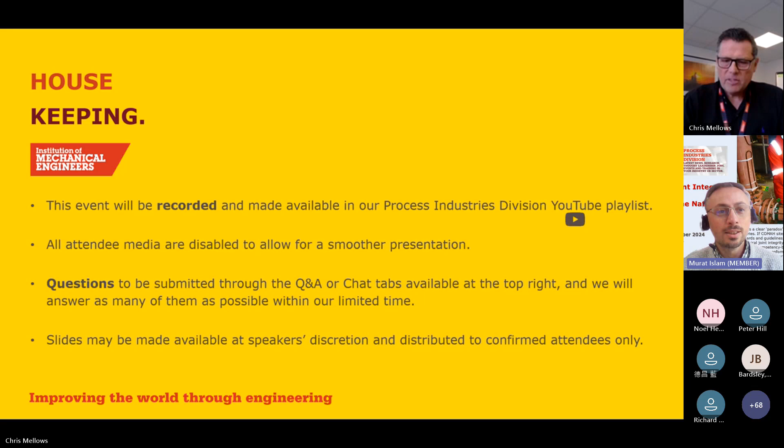Okay, thank you, Murat. As Murat explained there, this is hopefully the first in a series of webinars, looking specifically at mechanical joint integrity and the issues and concerns that we are finding and have been finding for many years now in our process industries. I hope you find the presentation of interest. So the way in which I've set this out is I'll do a quick introduction, just going on from Murat. Just going to look at the current state of mechanical competency in the UK. I'm going to be sharing some data, some statistics, lots of photographs and things that we find out in industry.

I'm going to look specifically at the current mechanical joint integrity standards, the guidelines, the compliance documentation that is readily available for our process industries. I'm specifically then going to look at the industry approved mechanical joint integrity training standards and qualifications for those that are responsible for making, breaking containment and remaking bolted flange joints. And then, look at the future, because there is a future. And then I'm going to summarize and hopefully we'll have a Q&A session at the end.

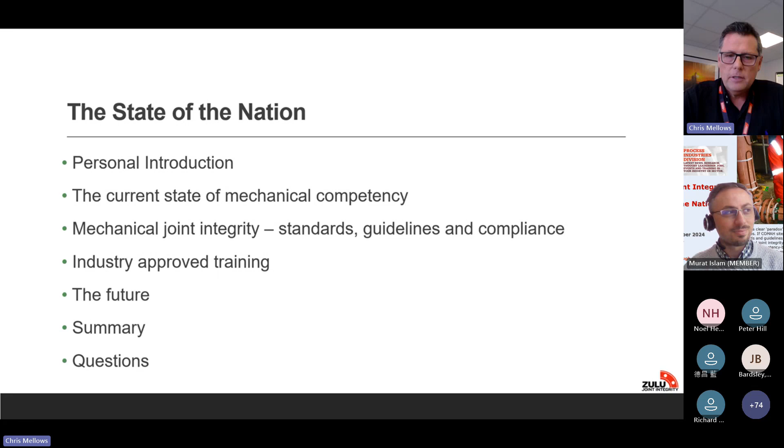So just a little bit about me, just going on from what Murat said. I'm the founder and director of Zulu Joint Integrity and Training Limited. Initially started the business 15 years ago, actually, this December. I've been involved in IMechE for the last 2 years, I think, maybe 3 years. I'm a Process Industries Division Board member and on the Education and Skills Strategy Board as well. I'm a board member of that, which is very interesting because we are looking at the subject of mechanical engineering throughout the UK, from school level, with STEM, etc., through to apprenticeships and the existing workforce that we have in industry.

My background, I'm a time-served engineer and apprentice. For those of you that remember the days of BP Chemicals, I'm a fitter and turner by trade and came through the apprenticeship route about 34 years ago. I've got a lot of experience in the oil and gas, petrochemical and chemical industries, specifically looking at hydrofluoric alkylation units on oil refineries, specifically for joint integrity and flange inspection. So that'll give you an idea of who I am and a bit about my background.

The business, so Zulu Joint Integrity, we are a joint integrity compliance and training company, basically. We help support UK industry and further afield. We actually operate overseas now as well. We look specifically at COMAH registered assets. We carry out compliance audits where we benchmark against the current standards and guidelines in terms of mechanical joint integrity.

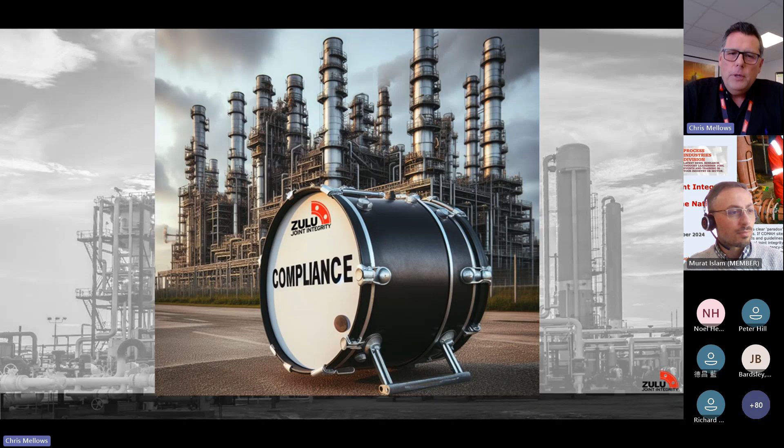There's a bit of an in-joke actually with us at the moment that we always seem to be beating the drum for compliance, and that's what we do as a business. I'm very passionate about the subject matter. Our business is very passionate about the issues and concerns that we are finding in industry, and it is that passion that really does drive us, and allows me to speak on a platform such as IMechE to yourselves about this very serious and often overlooked subject matter.

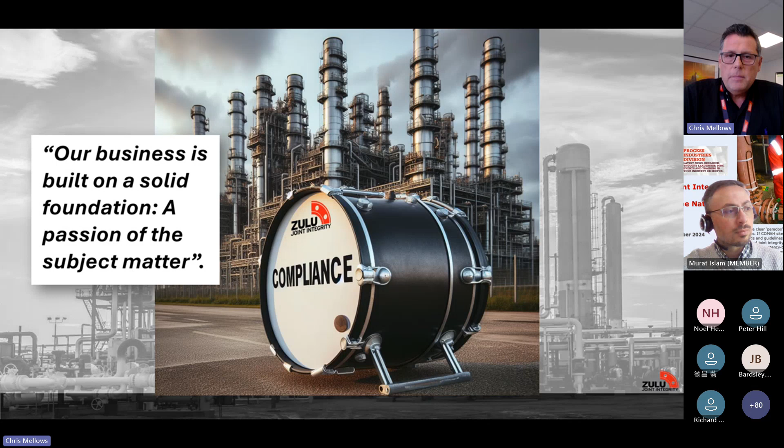We really do have to look at the current state of mechanical competency, and if there are any members who are present today in a turnaround role or maintenance role, you will no doubt have felt the pain during a turnaround event, etc.

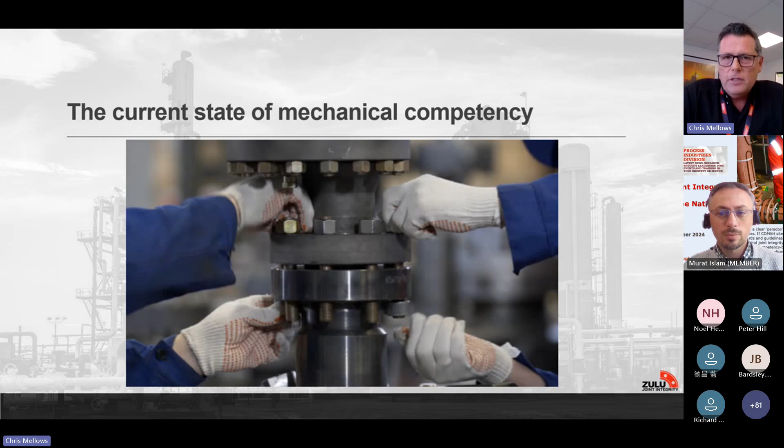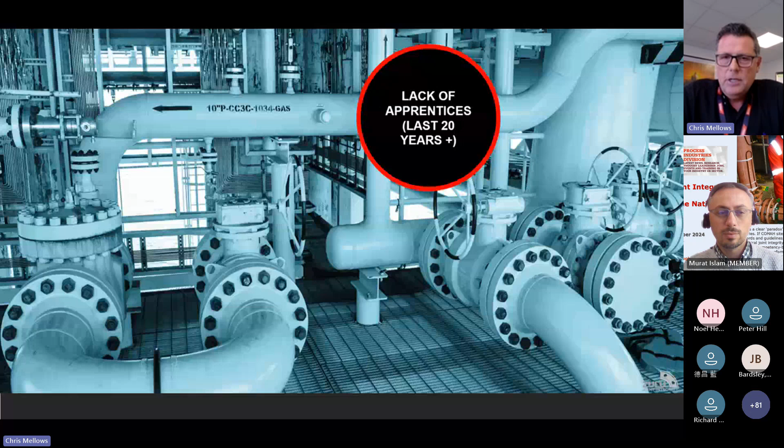We need to determine where our current process industries sit, and we have to understand the current state of mechanical competency. So if we look as a snapshot of history, if you like, we have had certainly a lack of apprenticeships over the last, I would say, probably 20 years across the board. And I'm honing in specifically on mechanical engineering apprentices. And that certainly has affected where we sit right now.

We have a lot of chancers, I'm going to say, in our industry. And yes, they've always been there in some shape or form. But we are, particularly over the last 2 to 3 years, seeing a very high level of bad workmanship, incompetencies. And when you investigate the personnel, perhaps, that have been responsible for loss of containment, for example, they are not who they say they are.

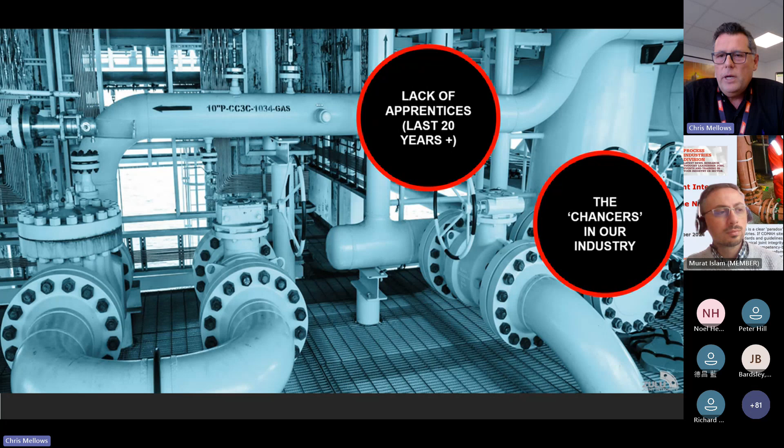So it's therefore very important that the checks and balances are put into place to ensure that the right people, and it's very difficult at the moment, I understand, because the labour pool is so saturated with these people. But we are seeing a worrying amount of chancers in our industry.

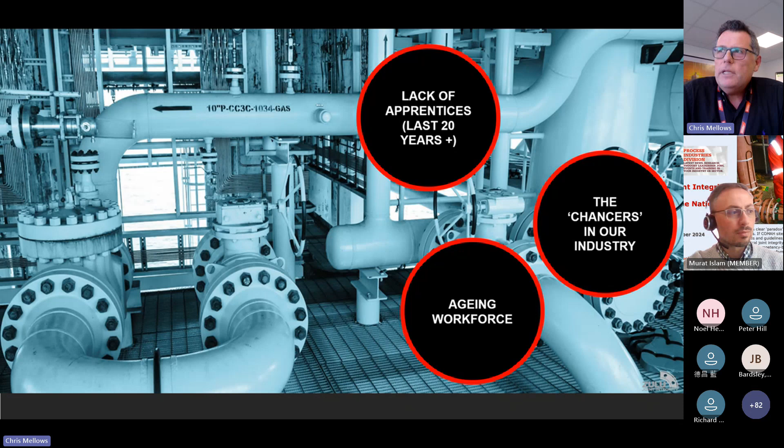We have an ageing workforce, and I'm not here to be ageist in any shape or form. But these people who no doubt have got a lot of industry experience, when they are retiring, we just don't have the younger element coming through to replace them. COVID actually really did hit industry. In fact, the demographic, if you look at people between the age of 50 and 60, were deciding post-COVID that they wanted to retire early. So it really did leave quite a gaping hole in our current industry.

Historically, there's been a shift towards academic education, and obviously there's a requirement and a need for that. But it seems that over the last 20 odd years plus, there's generally been a feel for young people to go to university to do a degree. Doesn't really matter what kind of degree that is. And therefore that has affected the apprenticeship scenario.

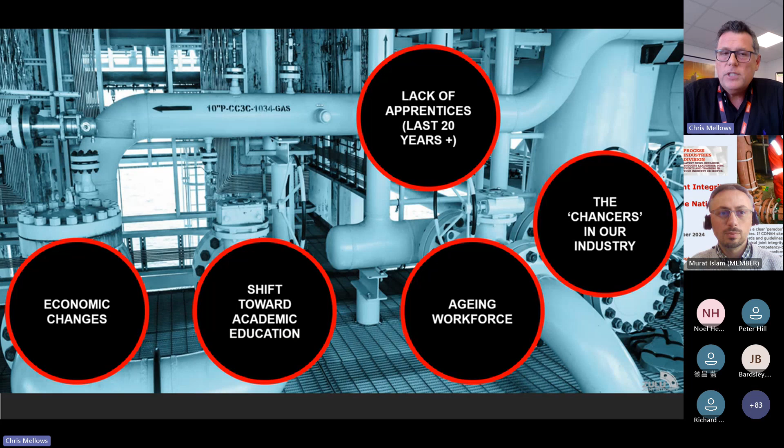Yes, there's been economic changes. I remember when I was an apprentice, when I started in 1990, there were 12 oil refineries in the UK. So that'll give you an idea of the way in which our industry has changed over the last 30 years. However, there are still a sizable amount, hundreds upon hundreds of COMAH registered sites within the UK. And so our process industries are certainly still buoyant, I would say.

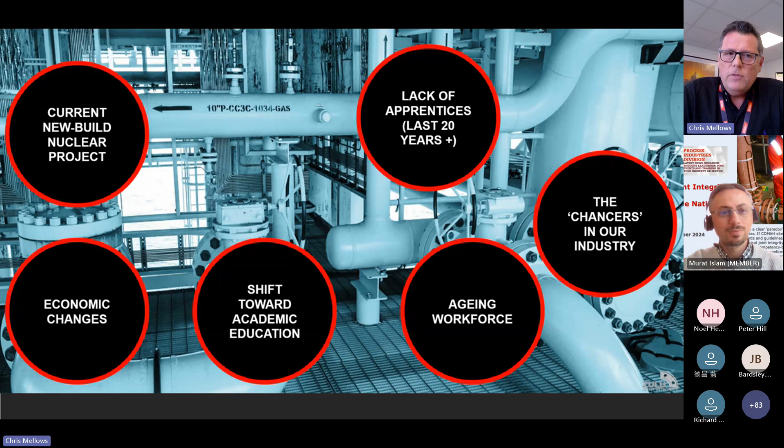And we have to acknowledge the fact that there are going to be, and there are currently, some massive nuclear projects within the UK. And I will mention the likes of Hinkley Point C, that seems to be kind of sucking the life out of our existing industries. There seems to be an exodus of personnel within UK industries wanting to get onto that project. And I think it's safe to say that we are all feeling the pinch of that throughout all the corners of the UK currently. So it's, I'm not going to say the perfect recipe for disaster, but it's the perfect recipe for the position that we're in right now, particularly in terms of competency levels.

As it's coming up to Halloween, I thought I'd put together a bit of a chamber of horrors. We've literally got 15 years' worth of photographs and evidence of bad things that we continue to see in industry when we are carrying out our compliance audits and flange inspection programs, etc. So here's just a snapshot of typical things that we find.

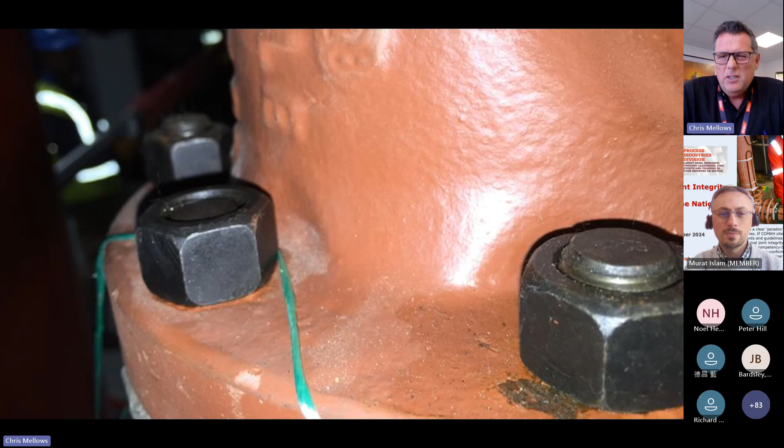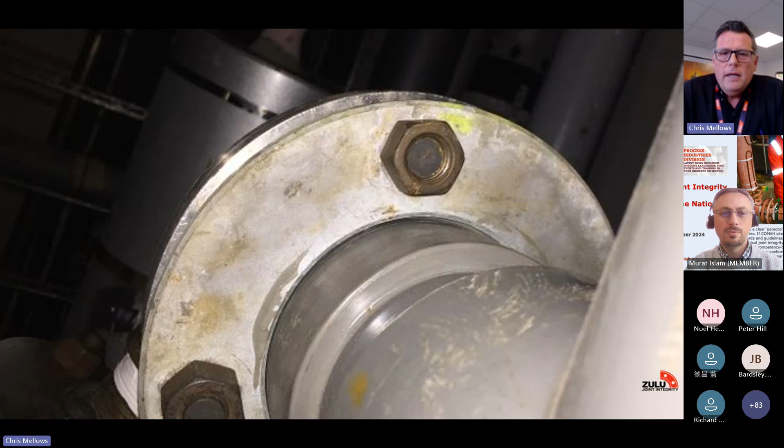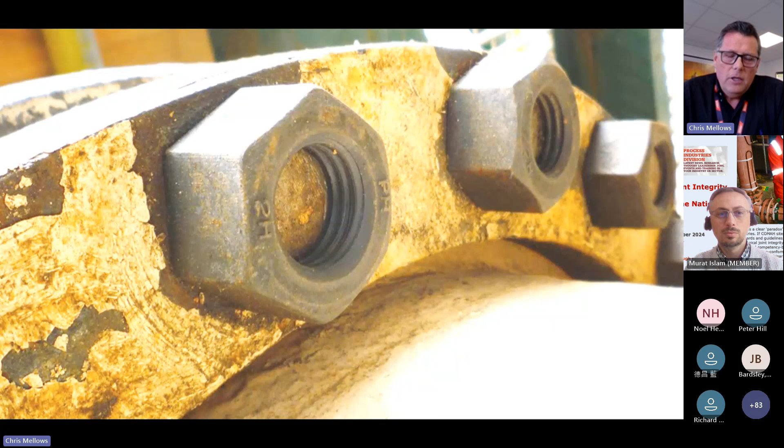A bugbear of mine would be bolt length, for example. Standards that are out there, and most sites, stipulate that bolt lengths should be a minimum of 2 to 3 threads. We don't accept anything less, and we are seeing an increasing number of these across our sites. Nuts on the back, on the reverse, on the wrong way round. And of course, there are varying levels of what we're going to say are short bolts. And that's probably one of the worst I've seen. And by the way, these are all photographs on upper tier COMAH sites within the UK, and this is just the tip of the iceberg.

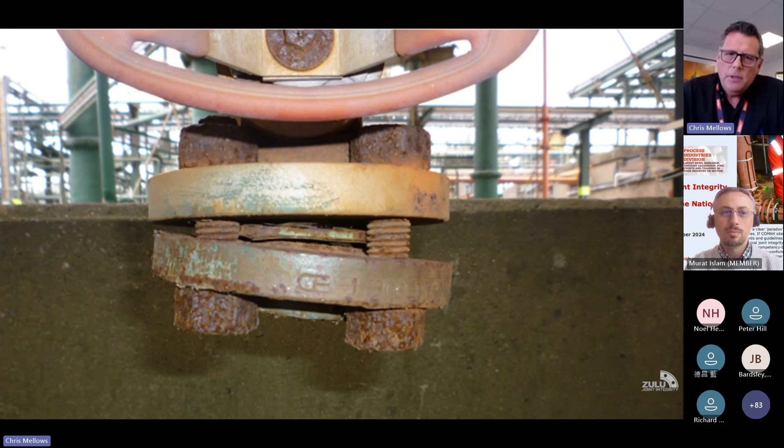Angular misalignment, parallel misalignment, we still see a significant amount of these on site. And as you can see from that photograph, that flange has been sort of left in situ like that for some time without anybody addressing it. We are just going through some turnaround events in the UK, and we look at collecting data during those turnarounds, and it's still evident that misalignment is certainly one of the top problems that we are finding, particularly in the chemical industry, where soft gaskets are used, for example, PTFE envelope gaskets, etc.

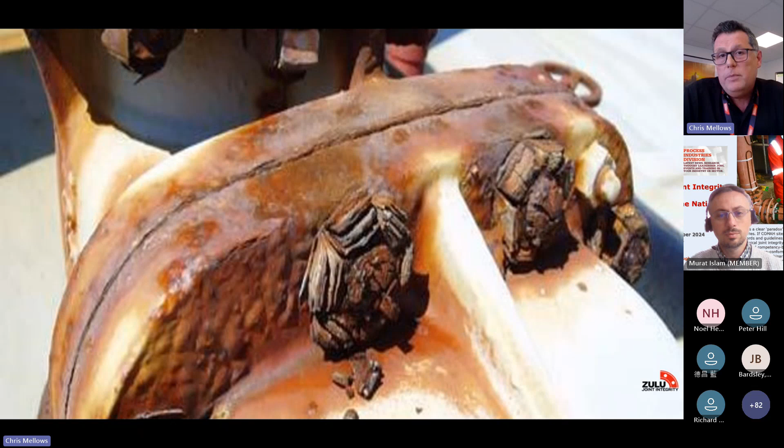We see a mixture of things like incorrect bolt materials being used, dissimilar materials, incorrect bolt length, incorrect bolts, including the diameter of the bolt, for example. We still see a lot of this on site. Corrosion is a massive problem also in the UK. Our sites are getting older, obviously, and maintenance is key, as we all know. However, we still continue to see plant and equipment in this state. Corrosion under lagging is still a big problem and concern, and always seems to have been, but it really is exaggerated right now.

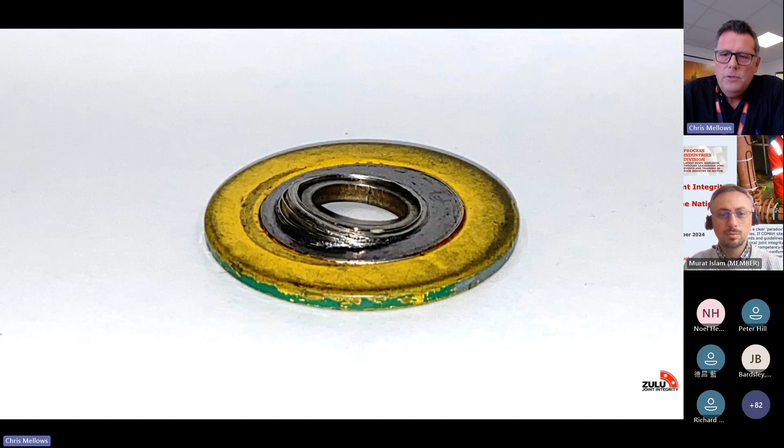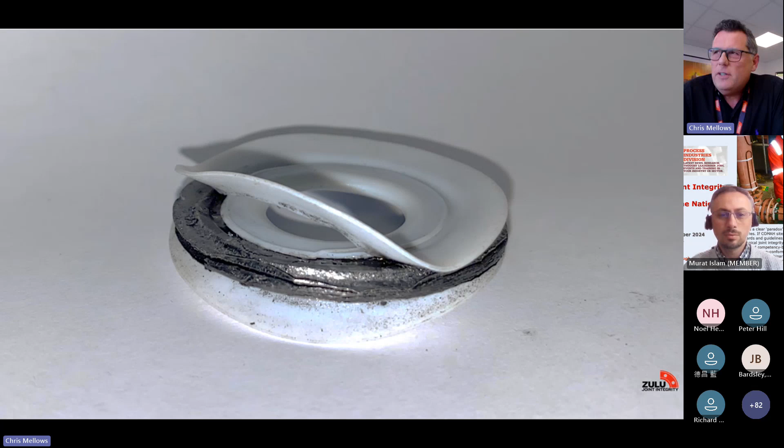We see a lot of issues relating to things like loose bolts, and I mean finger loose. You can move the nut on the thread. Likewise, we see a lot of over-torqued bolts on flanges because the bolts are being flogged up and gunned up using unconventional old methods rather than a controlled method such as using a torque wrench, etc. So therefore bolts are being put into yield. Particularly soft gaskets like this one, a PTFE envelope gasket, have been absolutely destroyed because the tightness of that flange is based on somebody's interpretation by hitting a spanner, or pulling up on something, rather than using a controlled method such as a calibrated torque wrench. So soft materials don't really stand much of a chance.

And we're still seeing a high level of these on chemical sites, even though the chemical site actually uses torque wrenches and they give out torque data to the personnel and to the contractors. But there is a human factor here as well, and that factor is that people like to just pull up a little bit more, or just make sure everything is tight enough, I guess, in their mind. We encourage people to stick to those torque figures that they're given and never exceed them.

We do still see 2 gaskets back to back. On the off chance we will see something like this where you've got 3 gaskets. The maximum we've seen is 5 spiral wound gaskets, all back to back. Generally, if something doesn't look that good, it probably isn't that good, and that's definitely a trait when out in the field looking at the state of a plant where we've got incorrect diameter bolts, etc. Double nutting, we still see that now and again.

Cutting gaskets, I'm sure you're all familiar. You might have seen something similar where the rule of thumb is the only gasket you cut is sheet gasket with a gasket cutter. You never alter the design of a gasket, but we're still seeing a lot of spiral wound gaskets that have been cut to size. Loose bolts, no bolts.

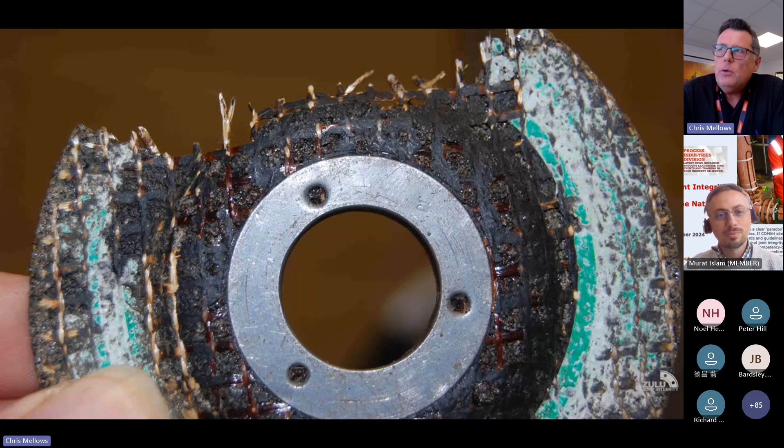And just when you think you've seen it all, about 4 or 5 years ago, we came across 2 separate sites in the UK, both within the chemical industry. One was a brand new 20-bar steam system project where we found, I think it was 5 or 6 slitting discs used as gaskets. And this particular one from another chemical plant that had obviously been in situ for some time and was leaking. I mean, that goes beyond somebody's rational sort of thought of using a sealing element within a bolted joint. And that's the problems that we are still facing, unfortunately.

I mentioned earlier on that we collect a lot of data, and data is a powerful method of really seeing the state of the plant, if you like, at the work face. So, for example, if you already use an existing joint integrity program whereby you record the amount of flanges that have been perhaps looked at during a turnaround event, as long as all the data is there, you can really dig down quite deep and find trends, for example, and see things that might be affected by perhaps the competency of the people on site.

What's interesting for me right now is that some of the turnaround events that we're doing, I've looked at the collective data, and we categorize our defects that we find out on site simply 1, 2, and 3. 3 being the worst, such as no gasket, wrong size gasket, loose bolts, that kind of stuff. Things that would ultimately result in loss of primary containment, for example. And unfortunately, category 2 and 3 make up about 50% of all our findings currently. And currently, we are looking at probably in excess of 6,000 to 7,000 bolted joints that we've inspected. That is a worry.

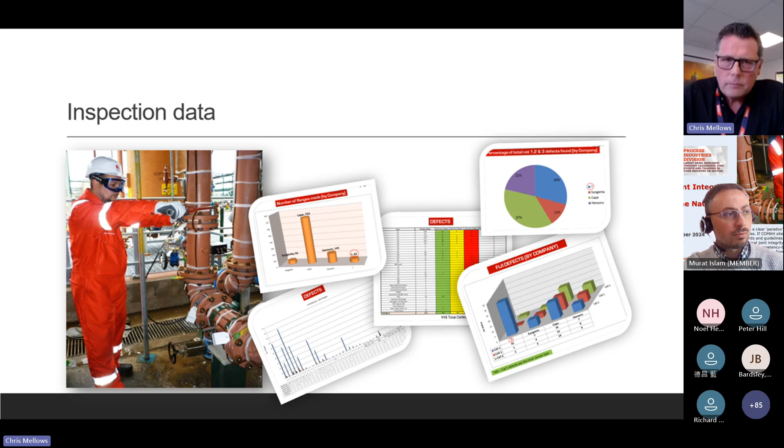Earlier on this year in April, there was a bolted joint seminar with IMechE in Newcastle, and it was a very popular event, and that's what really started this off. At the time, I was giving a very similar kind of talk during that seminar, and as part of my preparation, I did this, and this data is very interesting, I think, because it relates to our business, my business, in terms of flange inspection. And I've gone back on data that starts back in 2010, right up to 2023.

The green bars that you can see there are basically the numbers of bolted joints that we inspect on turnarounds and projects and things like that. And the red bars are the number of defects that we find. What I've done is I filtered out all the insignificant defects and just left in the bad stuff. And the black boxes that you can see there are the percentage defect. Now, what's interesting to me is that the green bars are getting more as the years go by, because hopefully our business is growing and we get more work. But sadly, the percentage defects are also increasing.

If you look at 2023, for example, we inspected nearly 12,000 bolted flange joints. That's either physically inspecting flange face conditions before the flanges are made, or physically looking at the made bolted joint. We torque check, we load check every single nut and bolt. That's quite a lot of work there, but to have almost 14% of all those inspections fail because of loose bolts, over torqued, wrong gasket, wrong size gasket, wrong type gasket, no gasket, slitting disc, that is a big concern.

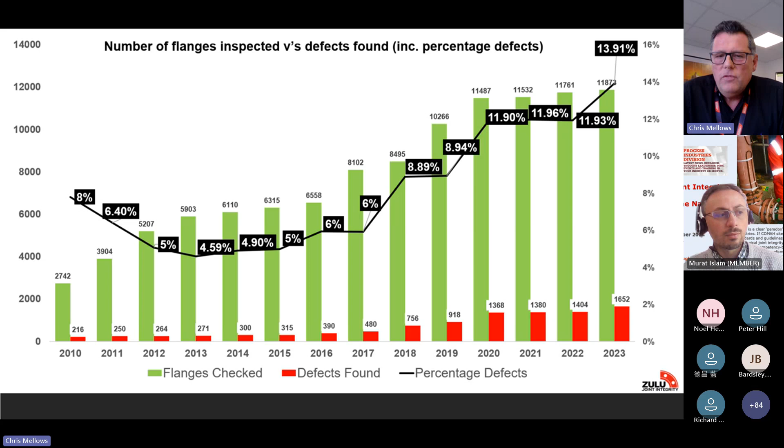It's a big worry, and I'm more than happy to share this, because this is just us, by the way. We're a relatively small medium business. It'd be interesting to see what other people are finding on their assets and so forth. So I just wanted to share that with you.

And initially, we always find when the plant and equipment is going back together, there's an initial spike of defects that are found. And typically, the asset owner will either have some sort of stand down or toolbox talk or whatever it might be, and encourage everyone, listen, let's stay focused on this. Let's look at best practice and so forth. And by the next week, things are really kind of dropping back down again. Even though the work is being carried out, we do not see that level of defects.

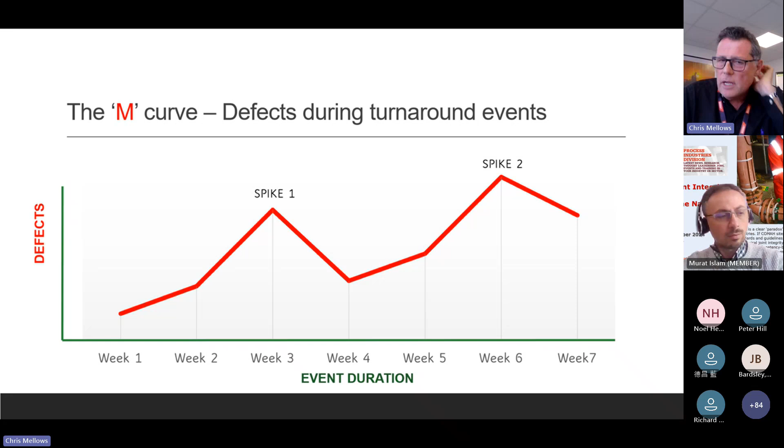And at that point, their interest, I guess, is, what's my next job? Where am I going to be working, etc. And they really take their mind off the job in hand. And we definitely see this particular M curve. So it's interesting for me. And we've gone back probably over the last 6 or 7 years, and definitely you can see a trend there.

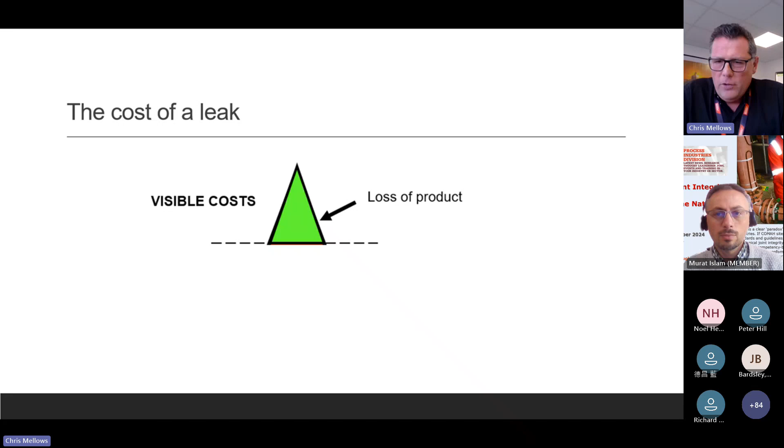The cost of a leak, well, there is a cost to everything. Obviously, there's a cost to a fatality. There's a cost to any type of accident, environmental incident, etc. The visible costs, I'm sure you might have seen something similar in the past, maybe. But the visible costs: you see the loss of product. You see the steam leak, the water that's dripping from that flange that nobody ever bothers with, but then we look at what we call the invisible costs, which are astronomical, actually.

The labor to repair leaks, the material, the plant inefficiency, the environmental fines, the lost sales due to poor image. No company wants to be on headline news for all the wrong reasons, that's for sure.

And it does still amaze me that I speak to organisations that are either upper or lower tier COMAH sites that don't have a recognised joint integrity process or procedure, and they ask me to come to site to give them a talk on what's required, and whether we can support them going forward. And it surprises me how many people actually say, well, how much is this going to cost then, to do this?

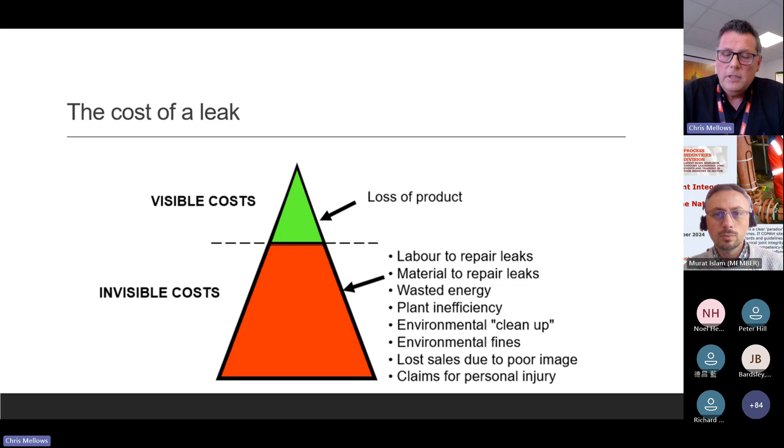And I find that a little bit disturbing and sad, actually, because what we do find is generally when things are done correctly, that will significantly reduce the possibility of a loss of containment and worse, obviously.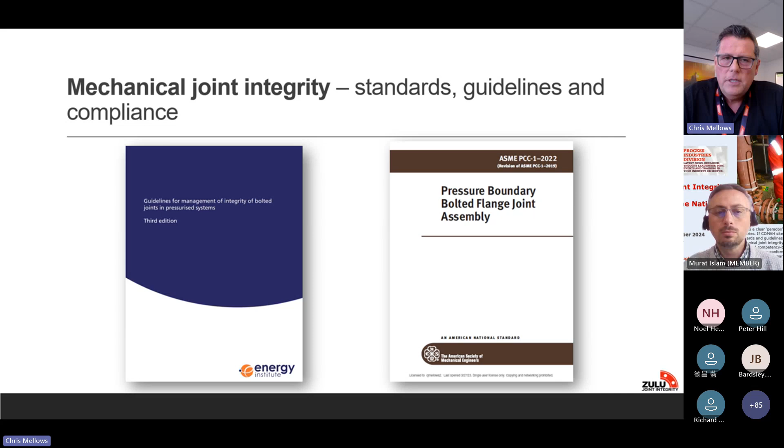Before I come on to the specifics of the training requirements, I just want to look at the standards and the guidelines and the compliance that's available right now in industry. Putting COMAH to one side, specifically, there are two standards and guidelines that are very, very important to our process industries. I just want to briefly go through them. The first one is the current 3rd edition of the Energy Institute guidelines for management of integrity of bolted joints in pressurized systems.

The Energy Institute obviously is the chartered professional membership body for the energy industry in the UK. This particular document describes the principles and good practice for the establishment of a management system for bolted joints in pressurized systems. It's an excellent document. As far as I know, the Health and Safety Executive partly wrote this document. They were certainly involved with it in its early days. And I know that the Health and Safety Executive, particularly during this seminar that we had, was speaking very highly of this guideline and what's contained within it.

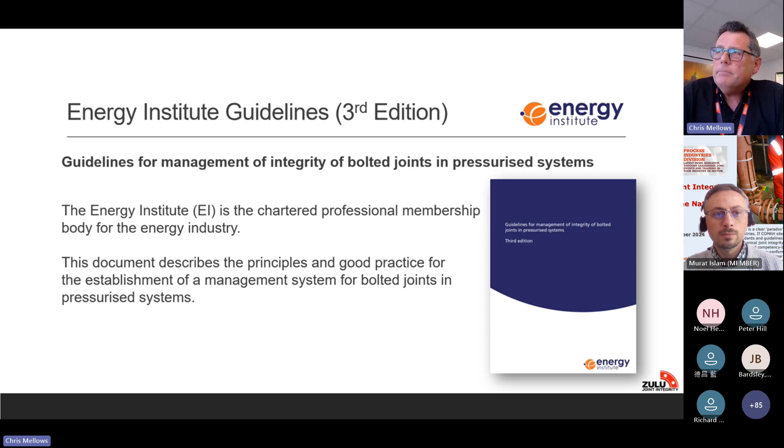I'm going to dampen it down a bit and say it's a dummies guide. I'm sorry, that's probably the wrong word, but if an asset doesn't have anything in terms of mechanical joint integrity, looking at the whole subject of it, then this really is an absolutely fantastic document to read and to follow. As a business, we encourage our clients to follow this guideline, and I'm happy to say that lots of them do. And it covers pretty much anything and everything from theory of mechanical joint integrity, integrity testing, hot bolting procedures, records and data management.

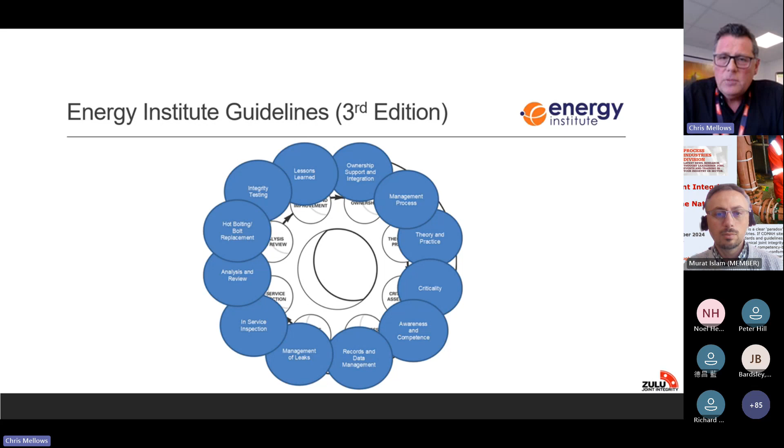It covers everything and anything to do with mechanical joint integrity, tagging, for example, criticality rating of flanges. And very importantly, it looks specifically at training and competency. So in section 5, for example, there is clear guidance on what qualifications your personnel or contractor personnel should have in terms of mechanical joint integrity.

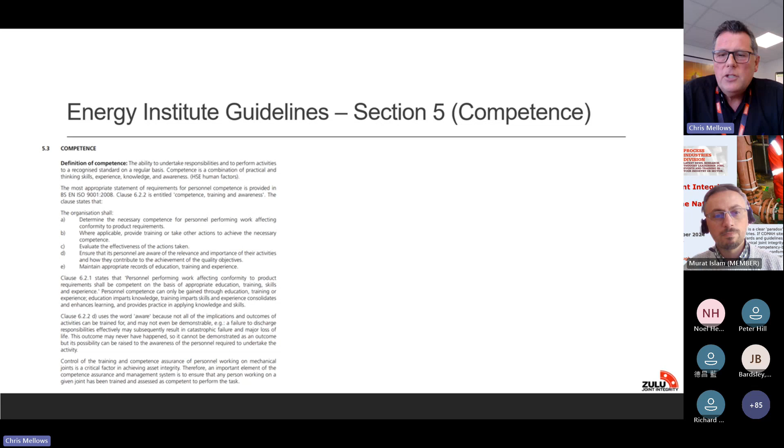Now, if you're like me, of a certain age, you remember that once upon a time there were no specific qualifications for mechanical joint integrity. It was the apprenticeship route, the ONC, the HNC, the City and Guilds, and it was all about learning on the job from your peers, etc. And what I will say is that the offshore industry, for example, has really championed the training and competencies required, probably for the last 25, 30 years, maybe. And it's good to see that being disseminated throughout our downstream process industries.

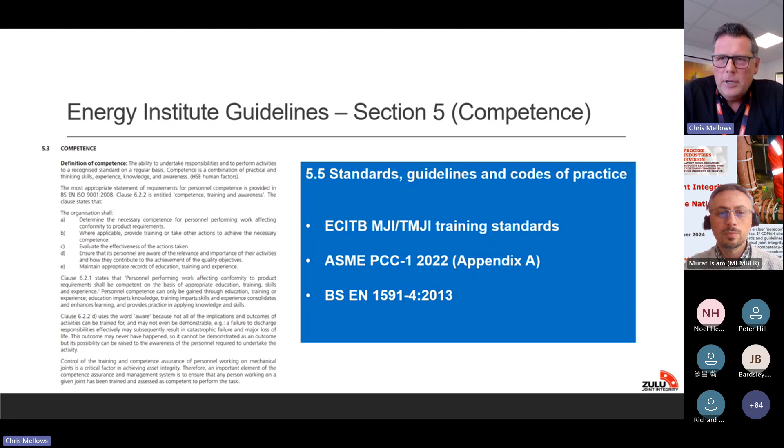Specifically, it looks at ECITB MJI and TMJI training standards, ASME PCC-1 2022, and BS EN 1591 Part 4. And I'll go into greater detail on it, but it says in there in black and white, and bearing in mind the Health and Safety Executive were involved in this, they are kind of telling you that, if I were you, I would get your guys and girls trained to these standards.

The other document is a very powerful standard, which we are seeing many changes with in the UK industry over the last 2 years: the current ASME PCC-1 2022, and in particular Appendix A, which refers to the training requirements. The ASME PCC-1 traditionally was a guideline, and a very good guideline at that, and lots of companies would take elements of that to be used within their existing joint integrity programs and their policies and procedures, etc. But in 2022, it became elevated to a standard within itself, and we've seen quite a shift change.

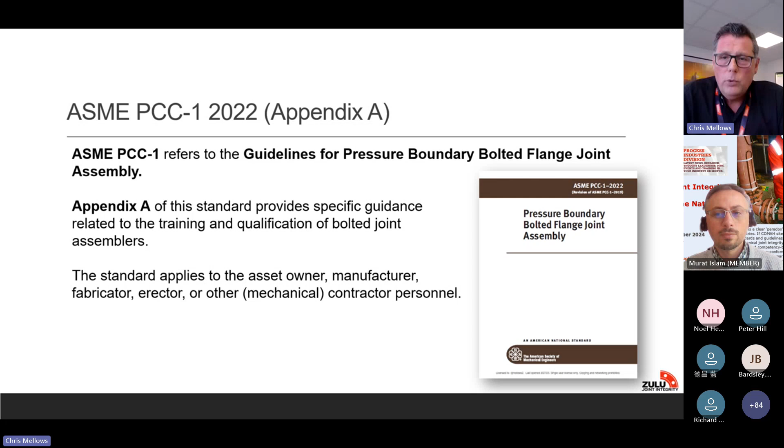I can't mention any names, but there are 2 oil refineries that come to mind in the UK that specifically look at ASME PCC-1 2022 as their guidance for onboarding of contractors, for example, in terms of competency levels. And just moving on to competency, according to the HSE, the true definition of competency is the ability to undertake responsibilities and perform activities to a recognized standard on a regular basis.

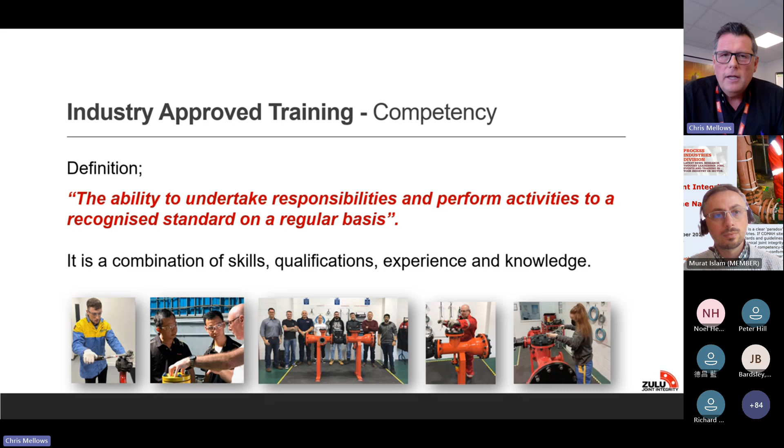And the big difference between training and competency is that people can be trained to do a task, but to be competent in something is completely different, because competency is based on a number of things, including your qualifications, your skills, your knowledge, and your experience. That's the key thing here. Just because somebody goes on a joint integrity training course for a day or a week doesn't make them competent. Absolutely doesn't make them competent.

So what do we have? Well, the three main training qualifications are the following. We've got the Engineering Construction Industry Training Board. We have the American Society of Mechanical Engineers, and we've got the British Standards also. So let's just take a little bit more detail on these. So ECITB, for example, you might be familiar with this.

Mechanical joint integrity and technical mechanical joint integrity training standards, also known as MJI or TMJI, are standards that, if you look at the history of them, derived from the UK offshore industry. And this is all to do with hand-torqued, flanged and clamp connector pipe joints. There are variations. So, for example, MJI 10 is the use of hand torque wrenches. MJI 18 is hydraulic torquing. MJI 19 is tensioning of bolts. And there are technical tests involved thereafter the initial.

What I like about this, actually, is there is a definite route to competency. It's not just about turning up and doing a 1-day or 3-day training course. You have to prove competency. So they've developed a clear route that also involves recording on site, a bit like an NVQ, I guess, work that you're doing, particularly making bolted joints, and having a supervisor sign that to say, yes, I agree that Chris was working on those flanges on that date, etc. And then you have to come back and do a technical test.

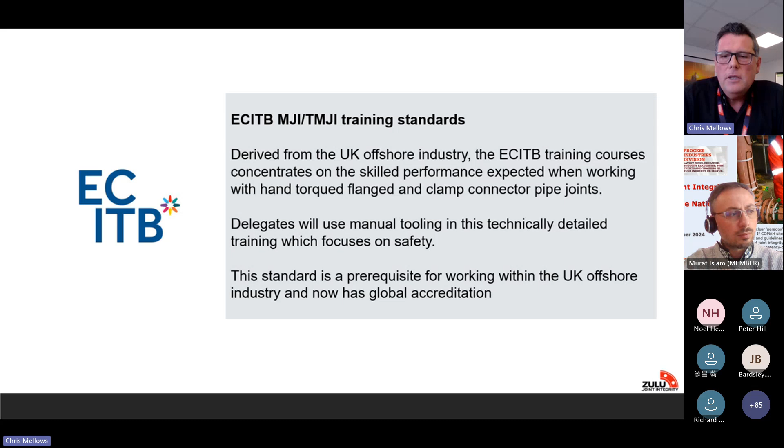You might well see on perhaps LinkedIn, for example, there are companies now in Malaysia and further afield in the Middle East who are developing and delivering ECITB joint integrity qualifications. The second one, well, as I mentioned earlier on, ASME, big changer, in 2022 when it became a standard.

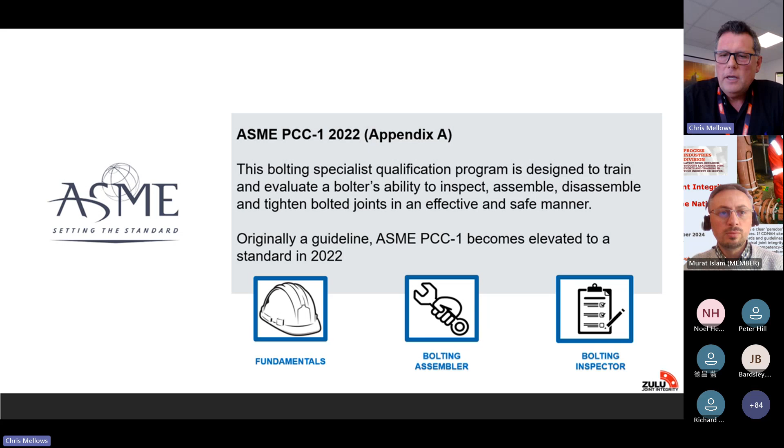The bolting specialist qualification program is split into 3 distinct areas: fundamentals, bolting assembler, and the inspection element. Fundamentals are for those who are new to industry. For apprentices, for example, it looks at the fundamentals of mechanical joint integrity. The bolting assembler is geared up towards the person who's responsible for remaking that bolted joint. And if you are involved in a QA or flange inspection role, then the third one would be the choice for you, really.

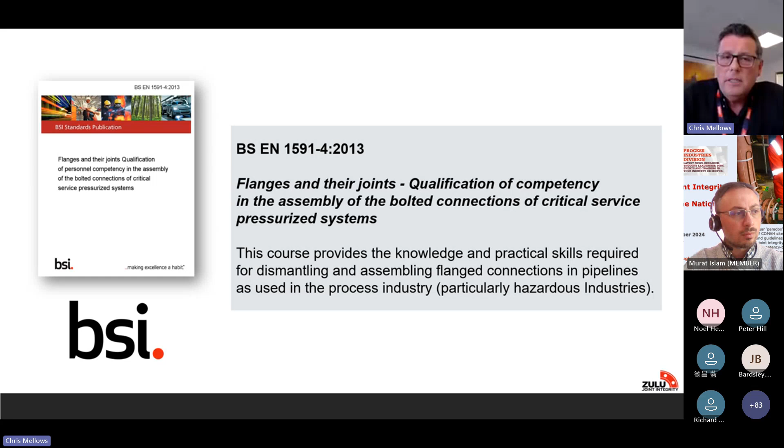EN 1591, also known as BS EN 1591, Part 4. Again, this is proving to be a very popular training course. This course provides the knowledge, the practical skills required for disassembly and reassembly of bolted flange connections. What I will say is that all 3 courses are very much hands-on. It's not just in the classroom, and there are tests. There's a theory test, there's a practical assessment, and it is possible to fail these courses.

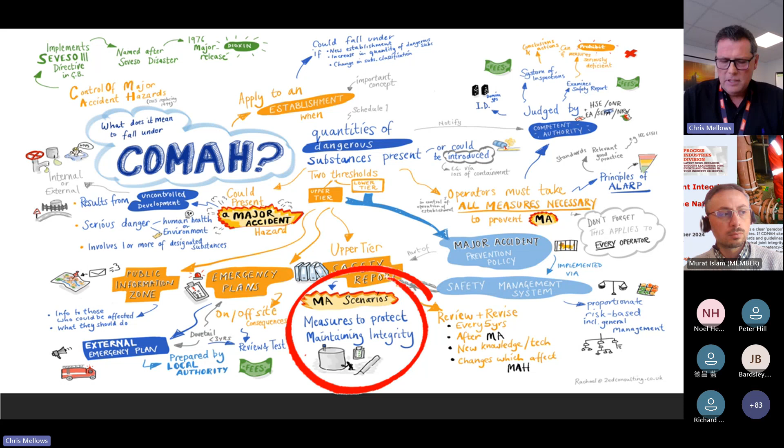Now, for anyone that's been involved in COMAH, it can be a headache. Obviously, it's very, very important to us. It's a regulation that's used throughout the UK industry. But clearly, as you can see, there should be measures to protect maintaining integrity of pipework, integrity of bolted flange joints, etc.

With all this in mind, I've come up with this kind of theory, if you like, that there is certainly a joint integrity paradox that we are seeing within our process industries. So, for example, if COMAH sites are highly regulated, which we know they are, if the industry guidelines and the standards are available, if people are attending recognised training courses, then why do we continue to see so many non-conformances and defects to bolted joint assemblies? It doesn't really make sense.

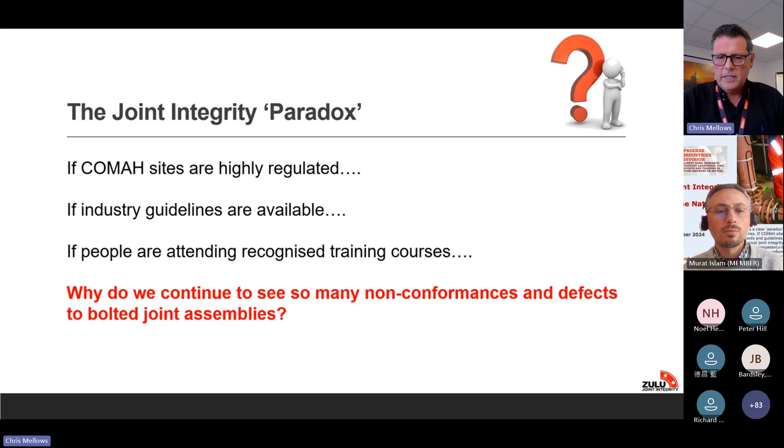And as a snapshot, and I've taken this from some data from ECITB, if you look at the number of people that are attending MJI courses with ECITB from 2012 to 2019, there's a sizable amount of people that are attending these courses and carrying out the tests, for example.

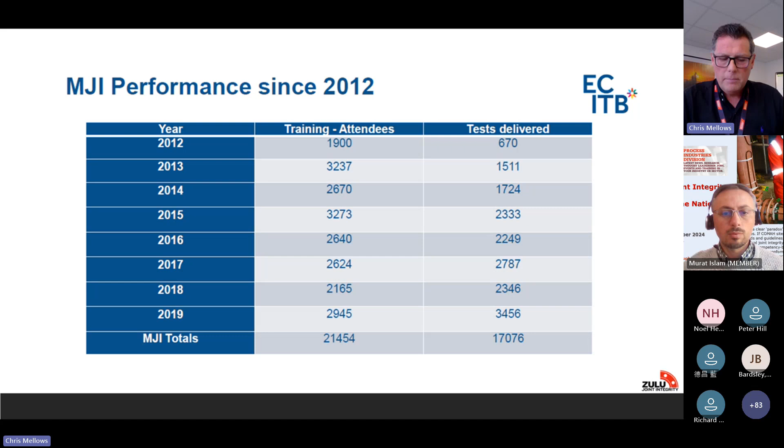So what are the possible reasons for this paradox then? Well, from my experience, and I've been doing this for 15 years as a business, and as I said, I'm 34 years in industry, what I would say is that some, not all obviously, but some asset owners are not complying to regulations and industry guidelines. Some are complying, but they are not taking the subject seriously enough.

Obviously, as I said earlier on, there's been a lack of apprenticeships since the late 80s and early 1990s. That's affecting the problems and concerns that we have out there right now. The aging workforce: there is a noticeable gap in the age profile on site. You will see that most certainly on turnaround events.

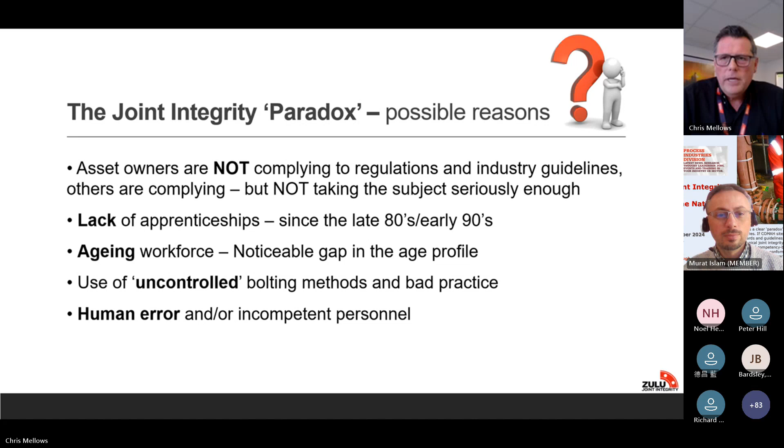It still amazes me that upper tier COMAH sites in hazardous industries are still not using the correct methods of applying torque to these fasteners. They use uncontrolled methods and bad practice. Spanners, flogging spanners, impact wrenches, scaffolding poles. I think we've all seen that at some point, surely. And that is a worry. And ultimately, human error plays a massive part in all of this. And in terms of incompetent personnel, we are seeing a worrying number of issues and concerns.

And I'm a little bit old-fashioned here in the fact that if you look at time itself, particularly from the 1970s to 2024, the mechanical trades, the coded welders, the instrument and electrical personnel, historically, the standards have always been maintained. They've always been high. Coded welders are forever tested, for example.

The complex requirements for electrical personnel and instrumentation guys, these are high level qualifications that, even though they're not mandatory, I think I've got that right within the electrical and instrumentation world. Even though they're not mandatory, it seems that industry is pushing these competency standards.

And mechanically, for those of you that are old enough, you would remember probably the trade tests that we used throughout our industries. But I've not seen that for probably at least a decade now. So collectively, by not ensuring that competency standards are maintained within the mechanical world, we've taken our foot off the ball really, and therefore our competency standards have dropped.

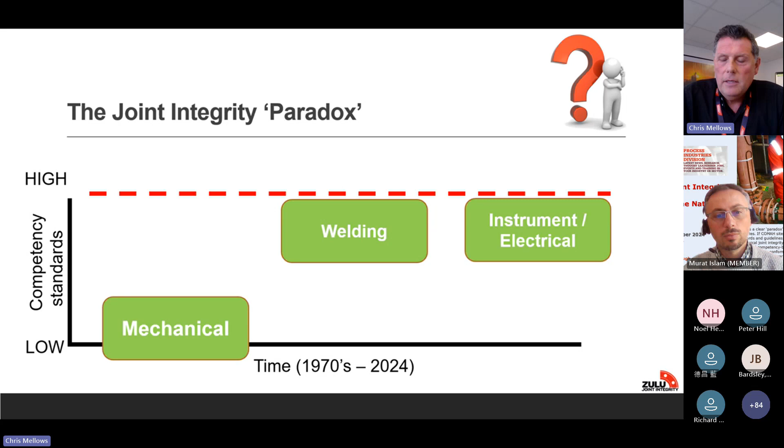And I'm not saying there are no competency issues relating to the world of welding and electrical, but we really don't see the same as we are seeing within the mechanical sort of world. So what does the future hold then? Well, there's lots of discussion, I guess. We don't have a crystal ball, as you can see there, but there's lots of discussion.

And I've been to several seminars now with IMechE where the industrial clusters in the UK, for example, are talking about these fantastic and massive projects for the hydrogen network and carbon capture, etc. And the one thing that's always in the back of my mind is that, yes, they are probably the biggest thing to happen since the Industrial Revolution. But who's going to be building all this? Who's going to be welding all that pipework? And who's going to be installing all those bolted joints? Because we really are struggling right now.

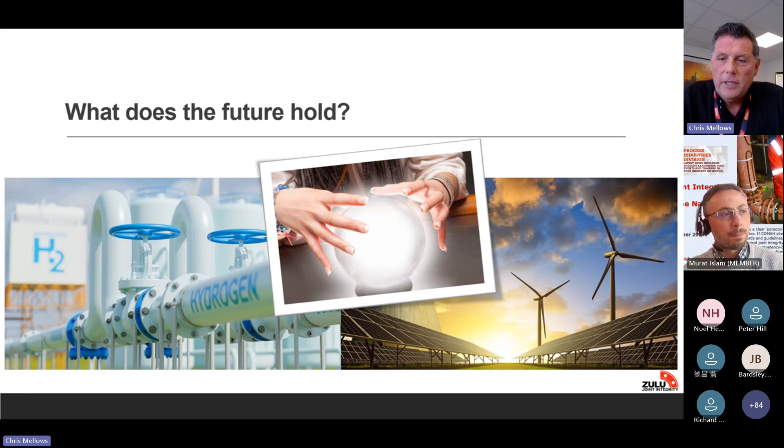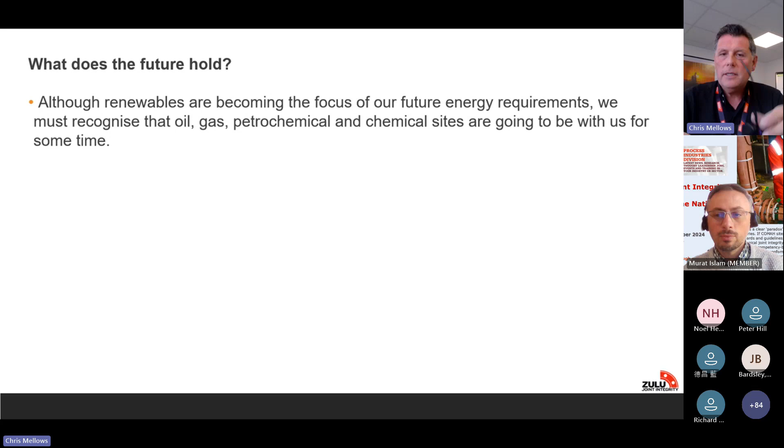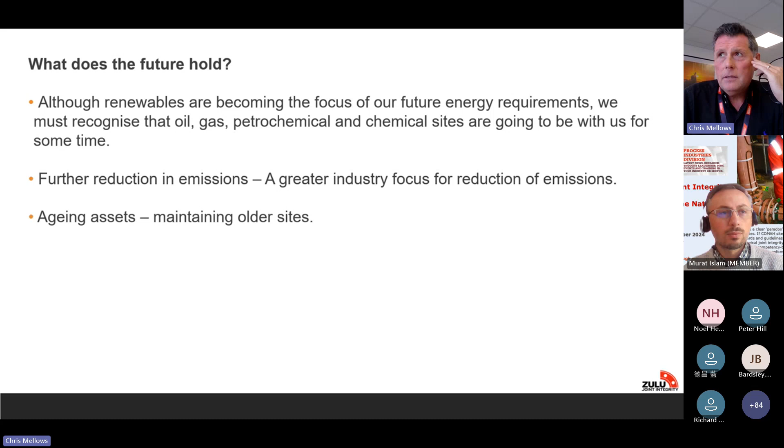So what does the future hold? Well, we know that renewables are becoming the focus of our future energy requirements. But we obviously have to recognise that oil, gas, petrochemical and chemical sites are still going to be with us for some time. There is a requirement for emission reduction, and that's been quite evident over the last 5 to 10 years, certainly. A big problem that we have is aging assets. We have to maintain our older sites. Things are not getting easy out there.

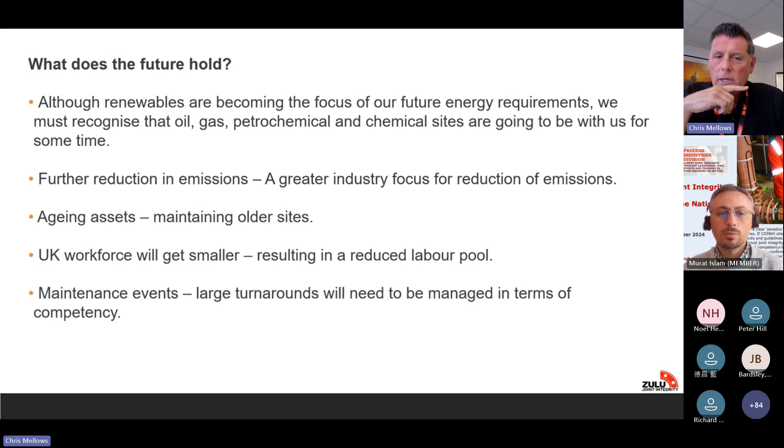The UK workforce will get smaller. What I will say is, ironically, the labour pool is actually growing at the moment, but it's the competency levels of the labour pool that are shrinking, and that is a big concern. Large turnarounds within our oil and gas and chemical industries will need to be managed in terms of competency.

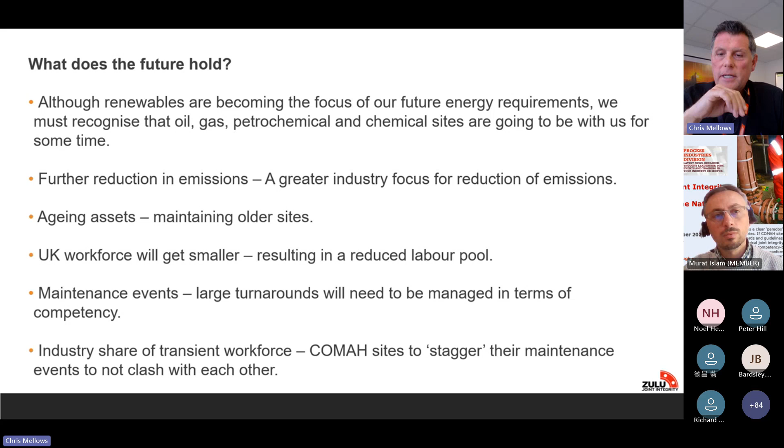And I do remember the days where most of the asset owners would talk to each other and stagger their maintenance outages throughout the calendar year. And what I'm finding is, certainly over the last 2 to 3 years, we are seeing a lot of doubling up of large turnaround events all happening at the same time. So the labour pool really is stretched, and we are certainly seeing the effects of that right now.

I've got that on there: black is the new green. So there's two things here that I was thinking of, in the fact that I keep hearing this term, green skills, and to me, there's no such thing as green skills. It's skills. They are skills, and they're skills that are required for the incoming green industries, etc.

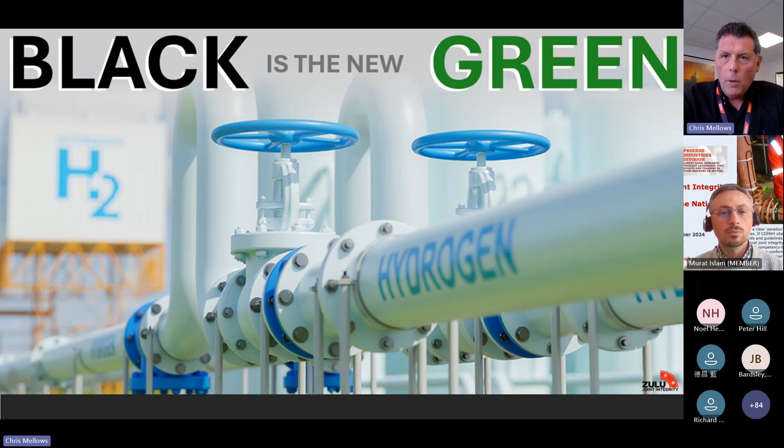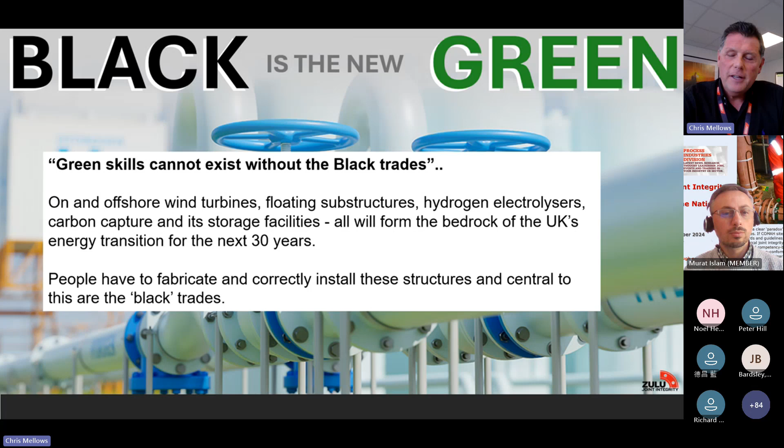But we cannot build and operate these future projects and industries without the old term, if you remember it, the black trades. People have to fabricate and correctly install all these structures, etc. So I've got this phrase: "Black is the new green." I think that's quite apt, actually.

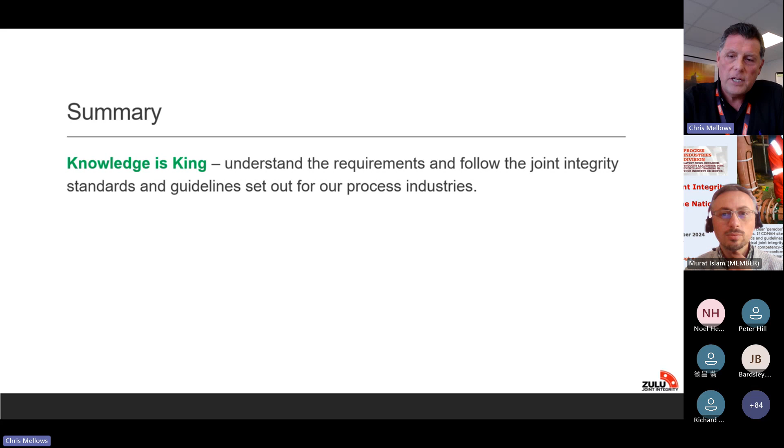So, just to summarize, and thanks for sticking with me on this, everyone. Knowledge is king. Understand the requirements and follow the joint integrity standards and guidelines set out for our process industries. If you haven't already got it, introduce a robust joint integrity process that includes things like flange tagging and third-party inspection. Record the data and learn from the data.

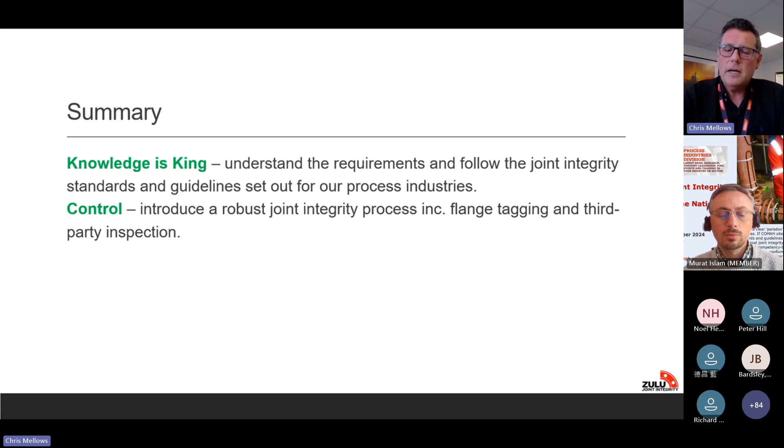If you're finding bad things on site, do not sweep it under the carpet. Learn from it so that you make things better. It's almost like a quality program, if you like. Record keeping is key. It's important to look back and to collect that data. It will give you trends. It will give you information that, if it's used correctly, can improve the situation on your site.

We have to raise the bar. Joint integrity qualifications and onboarding standards, not just for your own personnel on site, but for the contractors coming on site. What I will say, and again, I won't name any names, but several of our clients have taken the leap of faith and insisted that anyone coming through the gate on their site has to have one of the 3 qualifications I mentioned earlier, as a minimum. And to back that up, what experience have they had, and what's their background, and so forth.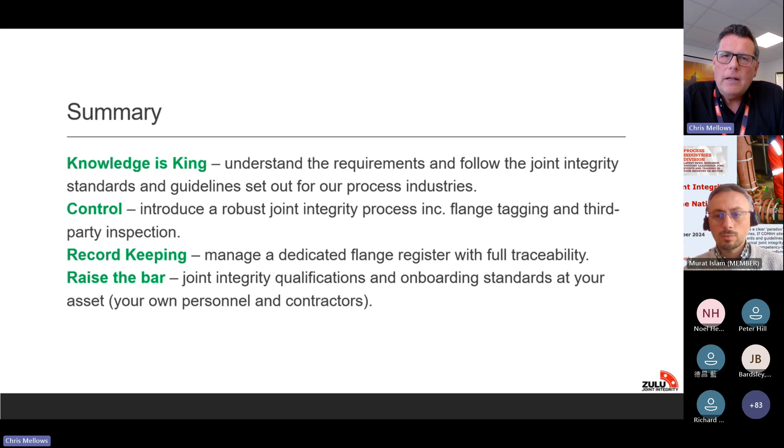Those qualifications in themselves do not make somebody competent, but what they do is give a level of competency, if you like, which will certainly please, I would imagine, some of the asset owners, because at the moment we don't know who's coming onto site. That's the problem.

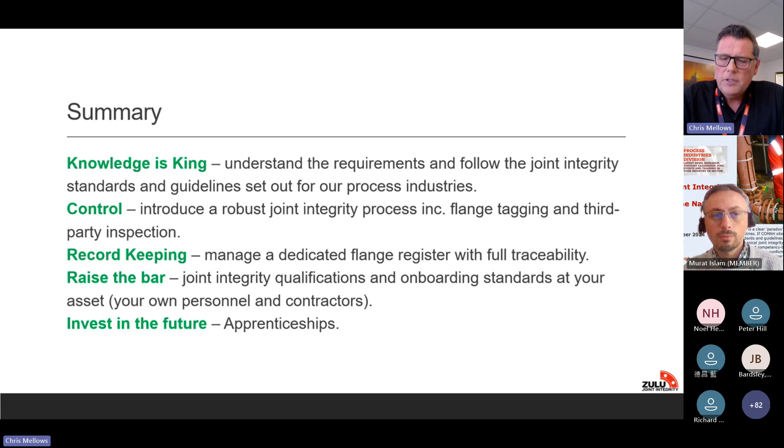Invest in the future. I'm stating the obvious there, but apprenticeships. We luckily train a number of mechanical apprentices across various different sectors, and it's always encouraging to see that investment. We need more of that investment, in my eyes.

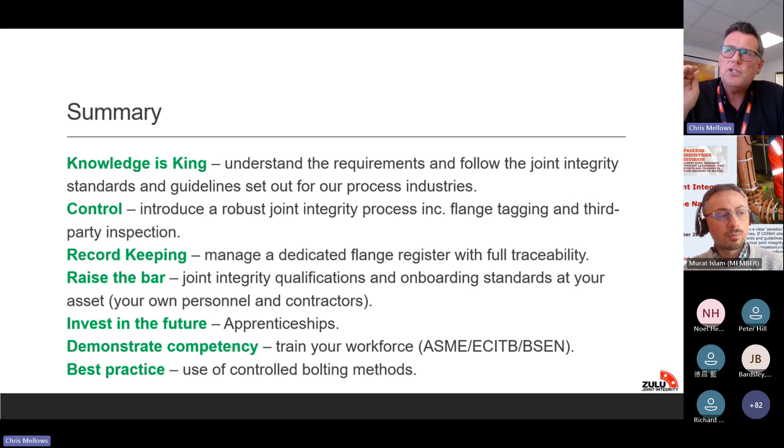Sorry, if we just go back one. The use of controlled bolting methods, for example, the use of torque wrenches, torque data, lubrication of bolts. All this kind of good stuff, this best practice that should be used at all times, and it never stops there. There's no sort of utopia, if you like. We strive for the best, but it's a continuous improvement. It never ends.

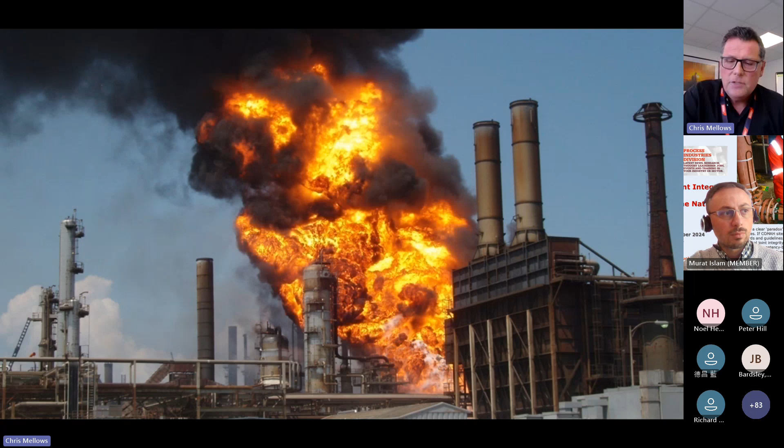I'm not saying all these were directly related to mechanical joint integrity, because they weren't. But these were very important milestones in our process industries, and our standards and our guidelines changed accordingly after these disasters. It's a sad state of affairs, but when industry changes, it tends to change after there have been fatalities in our industry.

And on a personal note, back in 2019, I did a compliance audit on a chemical site. It wasn't in the UK, and it was quite a damning report of what we found on site. We gave our recommendations and they were ignored. And I found out that earlier on last year there was an explosion on site and there were several fatalities. And the root cause was all those things that we brought up during that audit.